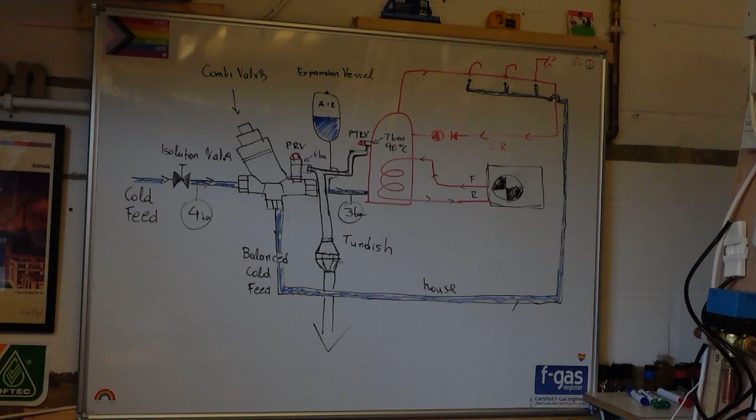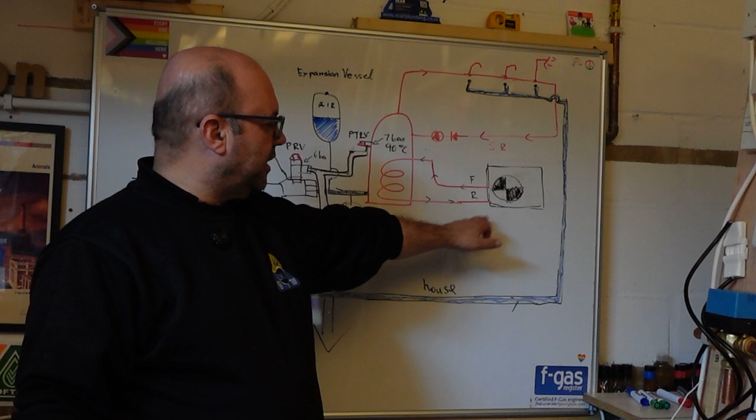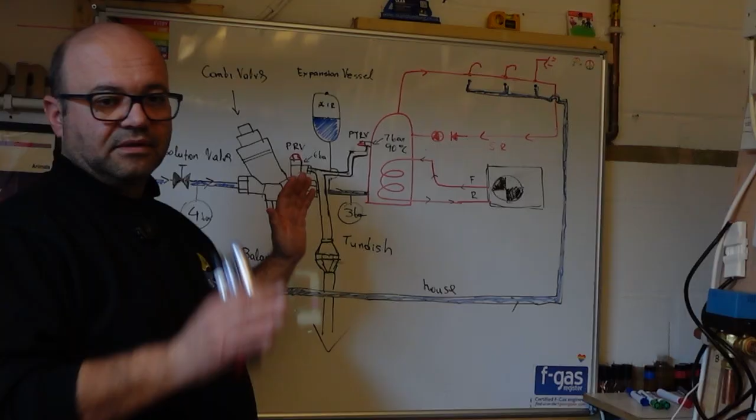Hi guys, Yanis here from Scan Heating, and today we will explain why the tundish is dripping on the unvented hot water cylinder. In this case, to change the routine a little, I use the air source heat pump instead of the boiler, but don't worry, it doesn't change anything. Regardless of the heat source - solar, air source, ground source, or classic boiler, oil, LPG, or natural gas - the reason the tundish is dripping on the unvented hot water cylinder side is completely the same.

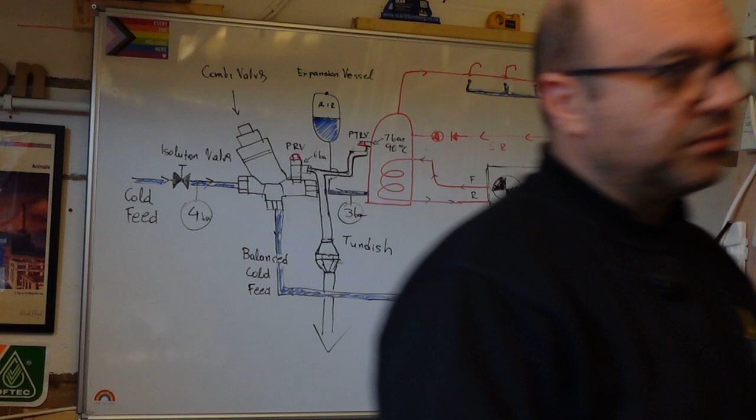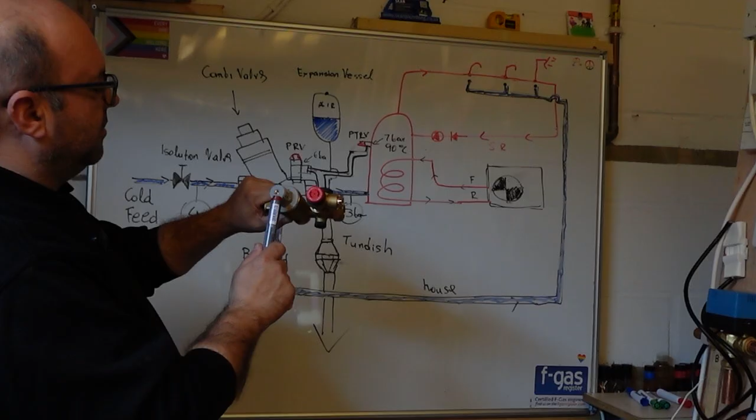To make it a bit easier for everyone, I created a combination valve to show more or less how it looks in reality, and I have one with me to show you, which is this one here, and I try to simulate it. This particular one is 6 bar here and 3 bar here. Let me show you on the camera - 6 bar this one and 3 bar this one.

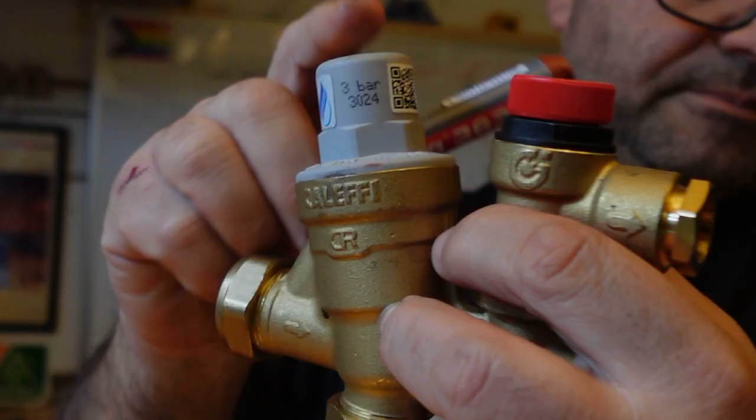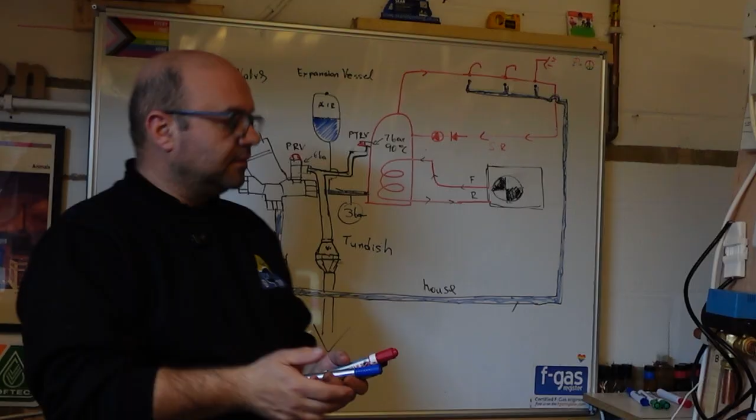Some customers ask me, Yanis, I can see drips here on the Tundish over there, or sometimes it looks like a little tap is nearly open. What's happened? Why does this happen? What's going wrong?

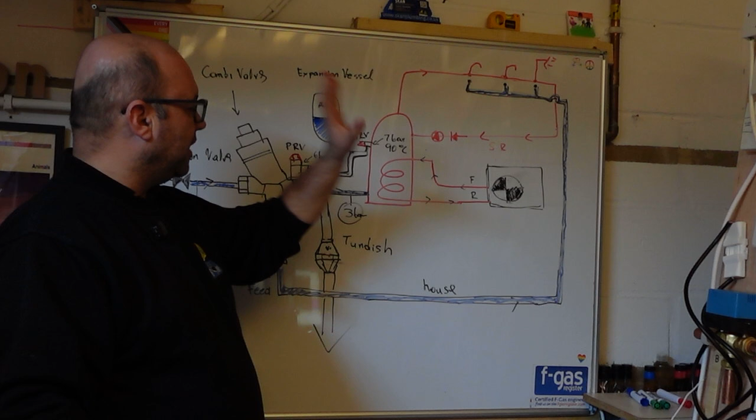First of all, we have to agree before we proceed to the next steps that every system needs maintenance. I don't know why customers - I don't want to speak about engineers because I don't want to mess around - but customers ignore that the air source heat pump needs annual service, or the boiler, and the cylinder which is part of the central heating system also needs maintenance. But customers don't ask for maintenance, or engineers don't offer the annual service as a combination.

If we leave the unvented hot water cylinder without maintenance, unfortunately the air inside the expansion vessel starts to disappear. And when this air inside the expansion vessel disappears, we lose the flexibility to bring the balance inside the cylinder. What I mean by balance, let's explain very easily.

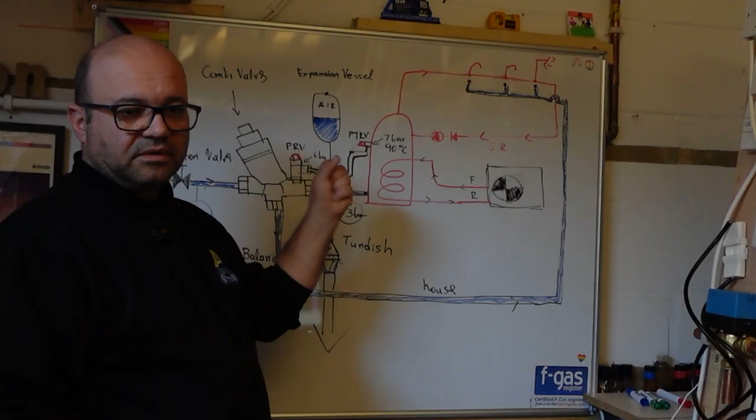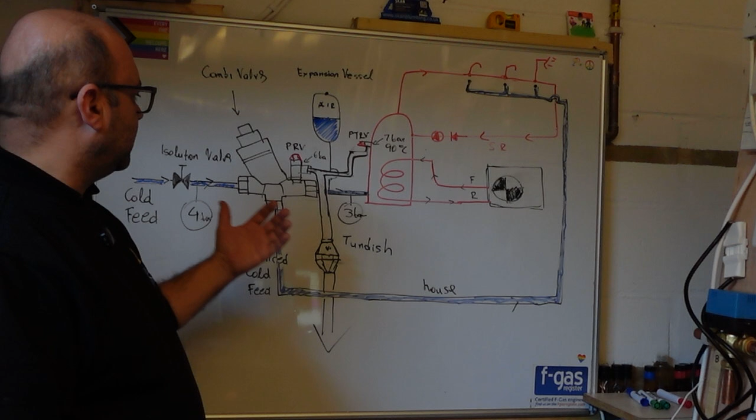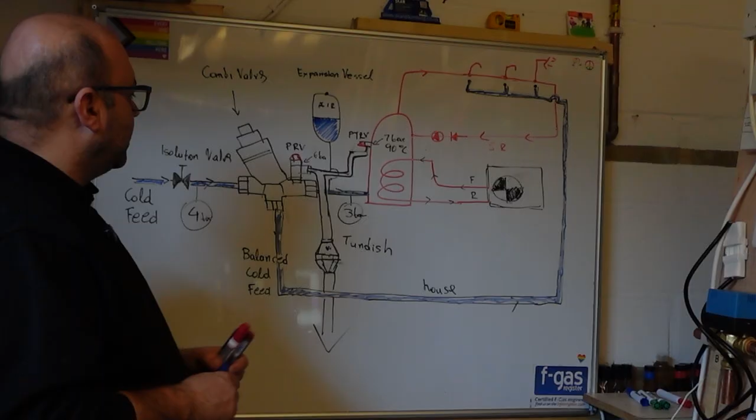The water, when getting hot, the size expands. I don't want to speak academically about the figures and the expansion per Celsius temperature, etc. But when the water goes from 5 degrees to 80, 70, 60 degrees, the size gets bigger. Because we're talking about a sealed system, this expansion goes here on the expansion vessel, and when the cylinder gets hot, the air inside expands, and when it gets cold, the air also moves this direction.

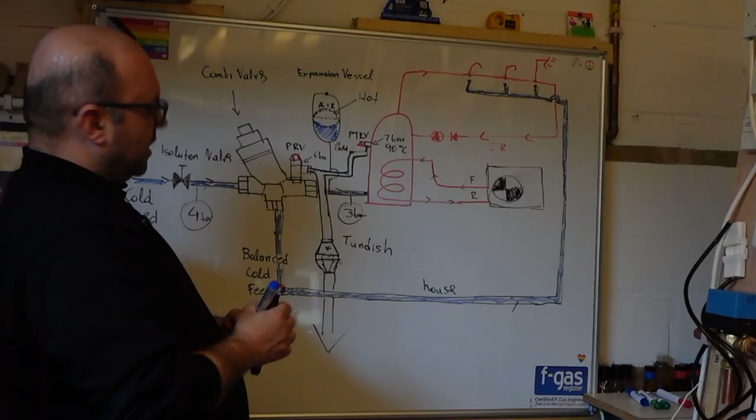Let me explain one more time. When the temperature of the water gets high, the expansion vessel has this shape - hot. When it gets cold, it has the bottom shape - cold. This fluctuation happens on a daily basis as the water gets hot, cold, hot, cold. This expansion vessel eventually loses its ability because it's not 100% airtight and needs maintenance.

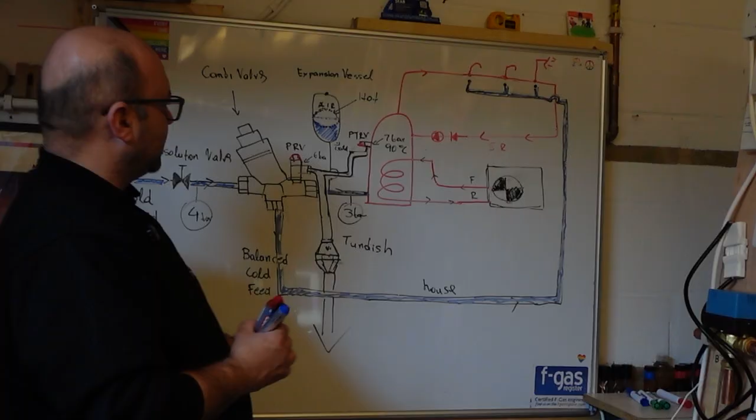Maintenance needs to recharge with nitrogen or with air when we do the annual service. But let's say in this case the ability of the expansion vessel is quite limited because it's on its last legs. It needs recharging or replacing as well.

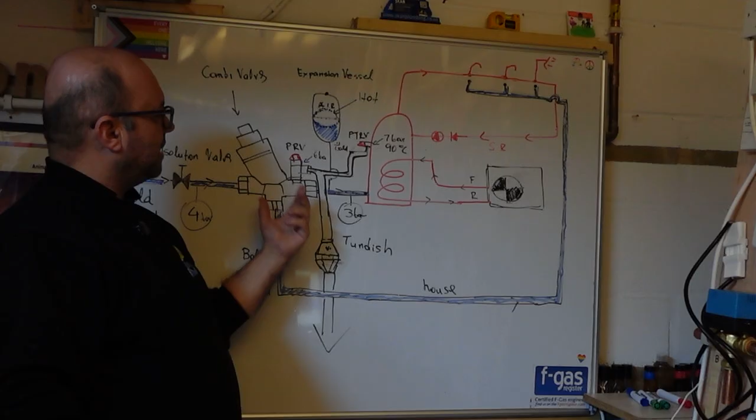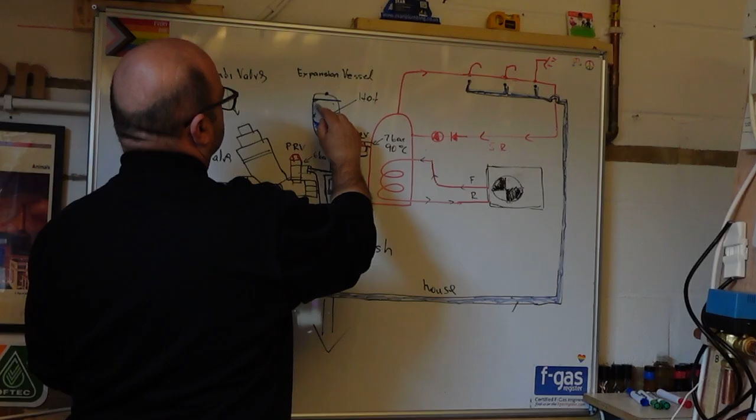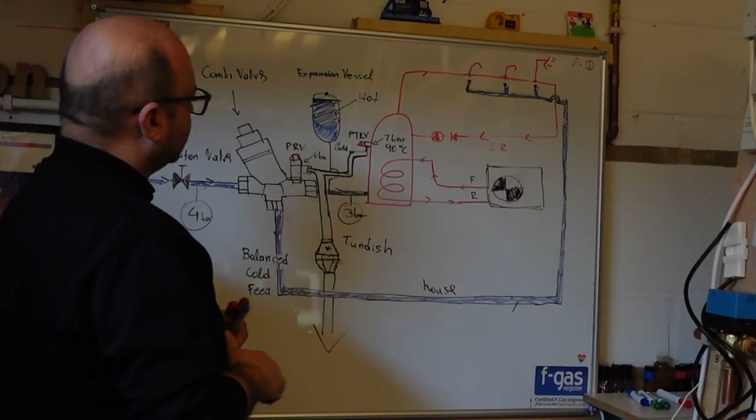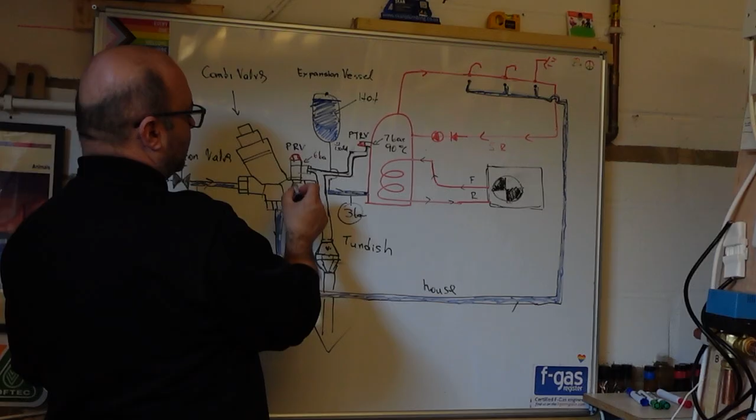What happens is when the hot water gets hot it cannot really expand anymore because it's full of water. And when you try to expand, it cannot expand anymore. As a result, the excess water has to go somewhere. We have two ways to take this excess water out. One is the PRV, which is on the combination valve I showed you here.

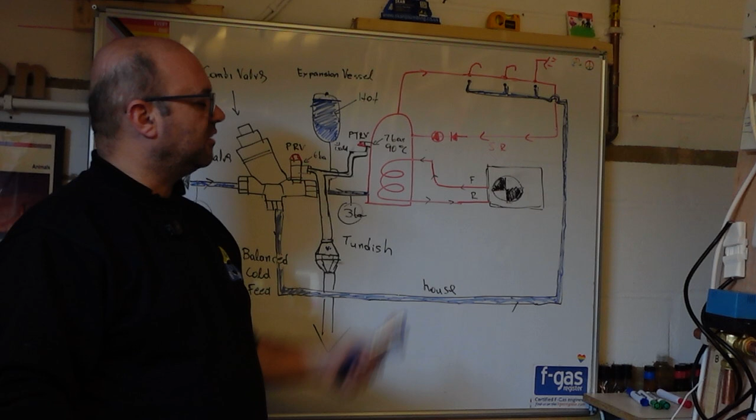This is the PRV, pressure relief valve. We also have on the cylinder the PTRV, pressure and temperature relief valve, which is set at 7 bar and 90 degrees Celsius, and this one is set at 6 bar. The good news is nothing's wrong with that, because it keeps the system safe, and when this one is damaged, the Tundish starts working.

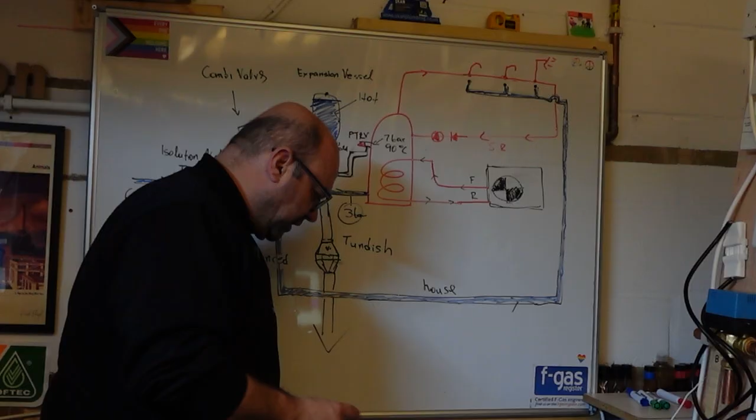I don't want to make bad comments, but a lot of people just go to the installation and change only this bit here without discharging the expansion vessel or replacing it, or without checking the ability to regulate the combination valve of the pressure.

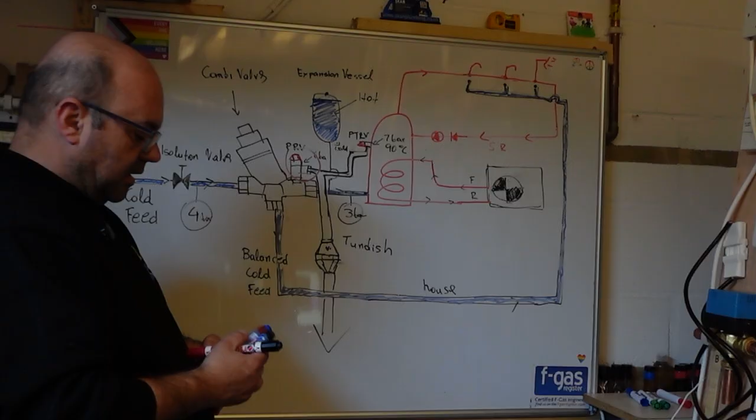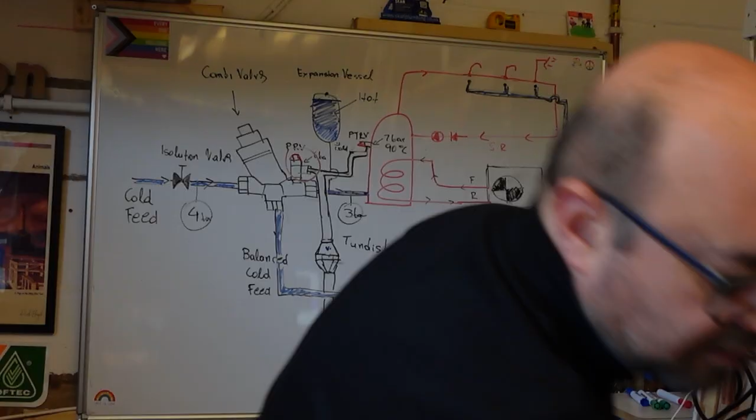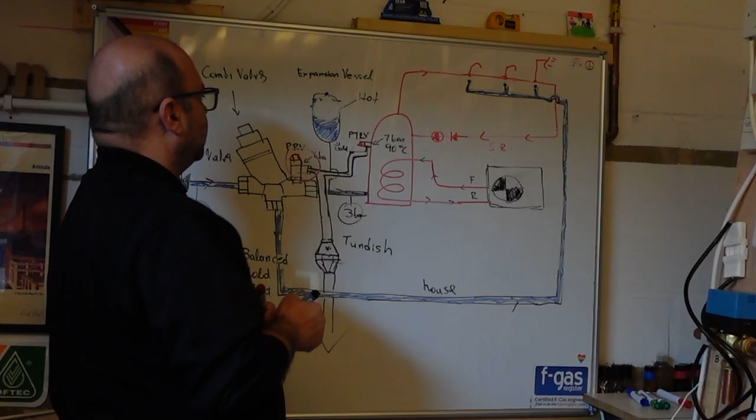After a month or two or three, if you're lucky, the tank is still dripping. The engineer goes back and says maybe I have to discharge a little bit of the expansion vessel. Let's say in the ideal condition the expansion vessel works - never going to be back to new condition, but definitely going to be better, and we give it the ability to expand.

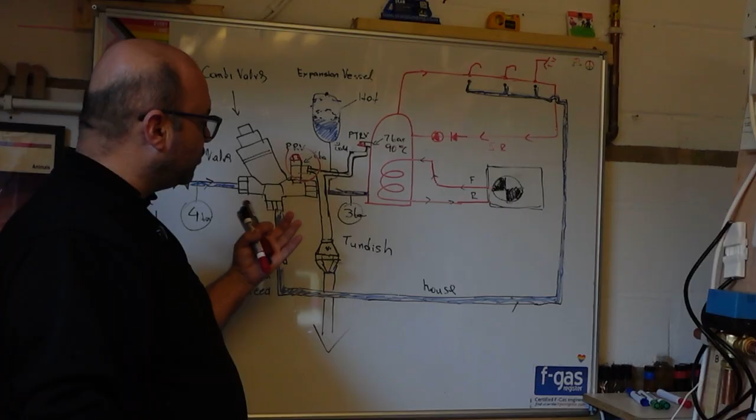But the tank is still dripping, because what happened is as soon as the tank starts, the PRV starts dripping, and unfortunately it's very unlikely to stop dripping. That's why it keeps dripping regardless if we discharge. Then the customer says, listen, it's still dripping, what can we do?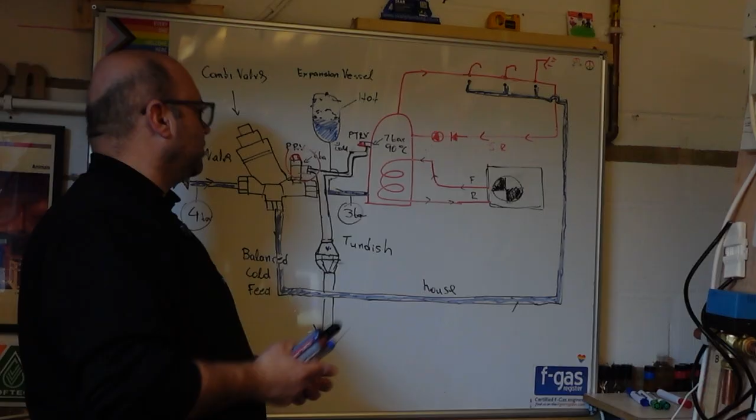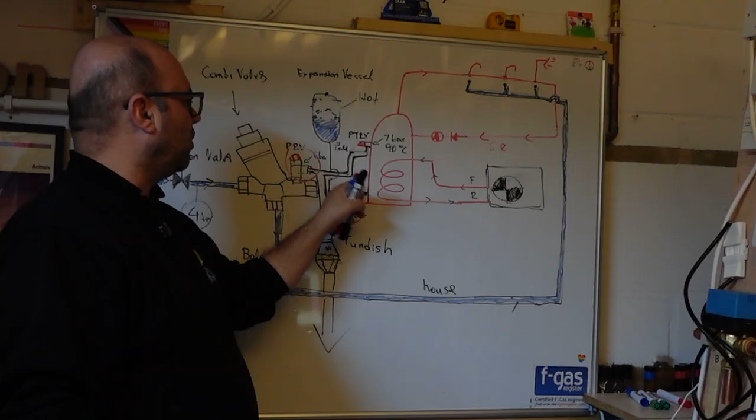Then the engineer thinks, oh maybe it's the PTRV. I will explain later how to check that. Normally if these drops are close together, it's very hot, and this one is quite cold. Of course there are other ways - you have to disconnect this pipe completely to see if that's dripping, and disconnect the other pipe completely to see if that's dripping.

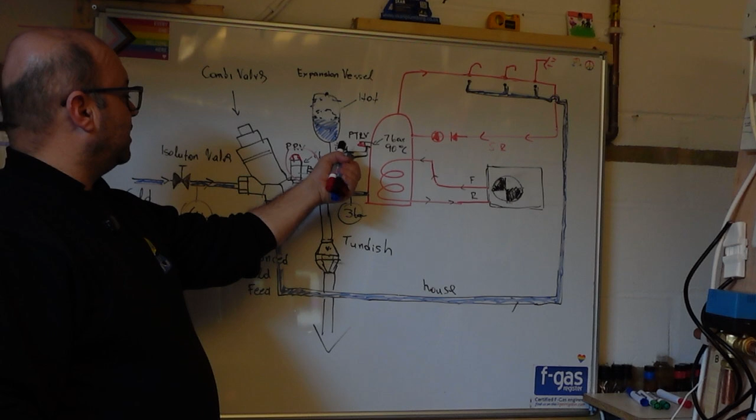And replace again the expansion vessel and the PRV, and say, oh that's cool. After 6 months, this one's still dripping. Why?

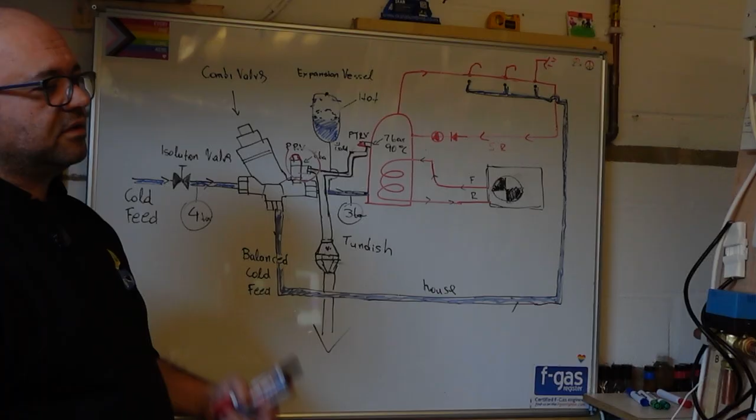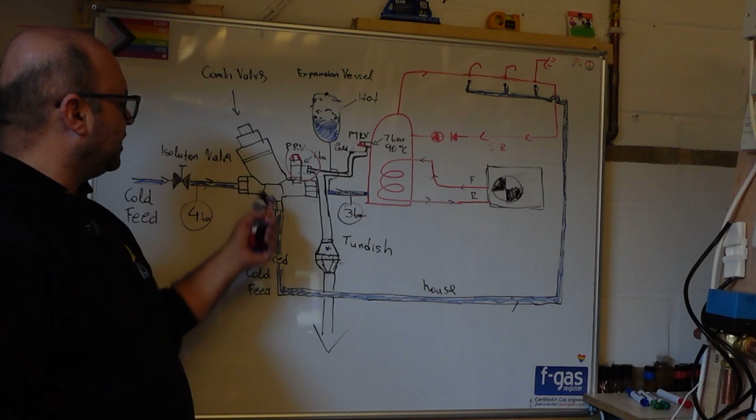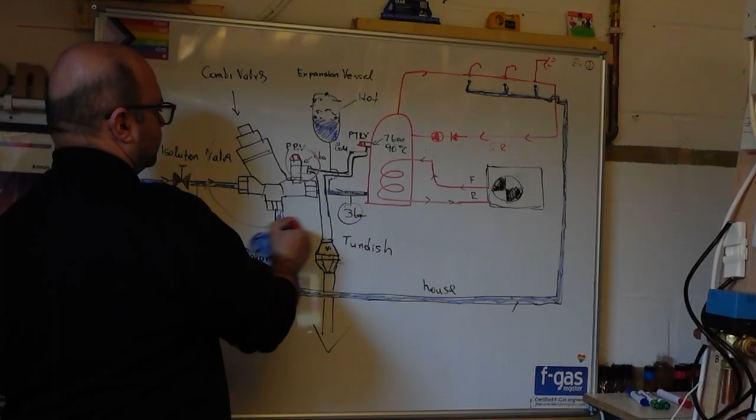Because bringing balance to the system is a very, very important thing. With limescale and the very hard water in the UK, the combination valve, unfortunately, gets affected as well, cannot regulate perfectly, and give us the 3 bar. Unfortunately in this case we have to replace the combination valve and the expansion vessel. If we did that at the first stage, we would never have any problem for the next 5-6 years, as long as we do annual service.

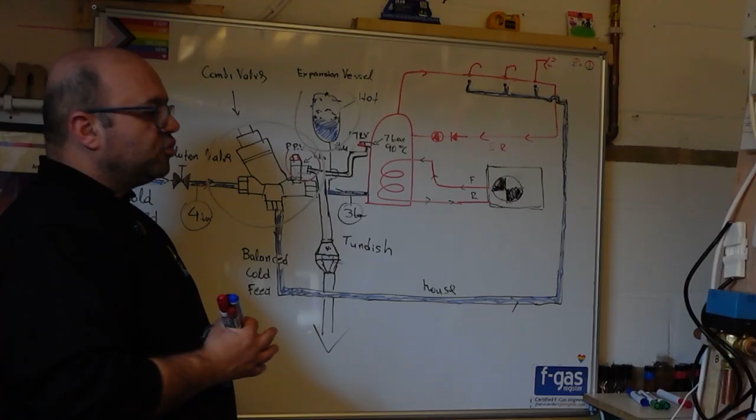Unfortunately for everyone, there is no shortcut. We cannot cut corners. The physics does not forgive mistakes. There is, unfortunately, no easy solution - the combination valve has to be replaced, and the expansion vessel.

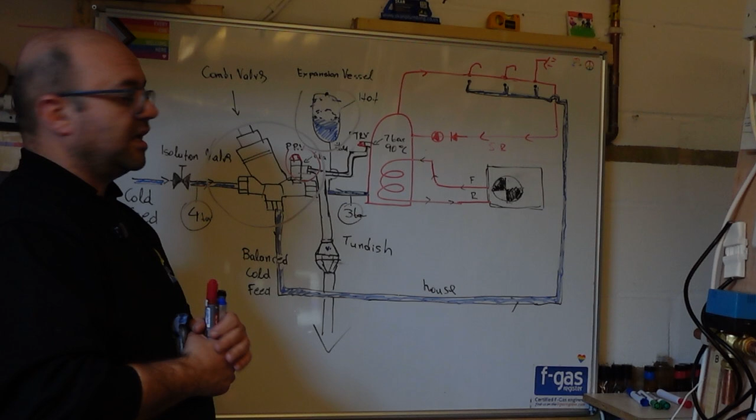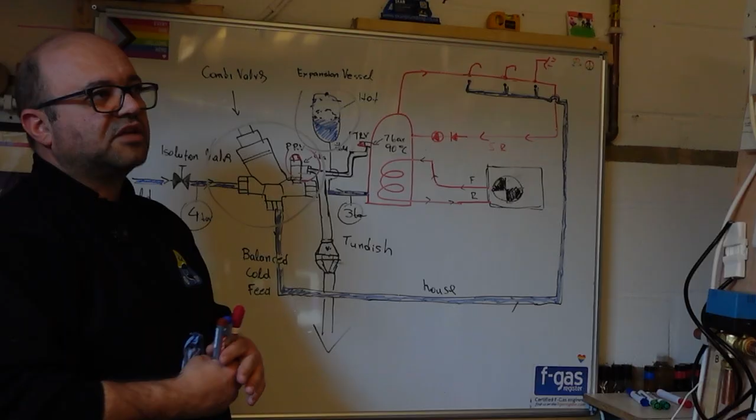The funny thing is, when I go to houses and people show me sometimes a certificate that the expansion vessel has been serviced as well in the cylinder, I ask, where is the service valve to do the expansion vessel? And of course there is no service valve. The customers don't understand what I'm saying, but it doesn't matter what the customers understand or not - the engineers never did the service.